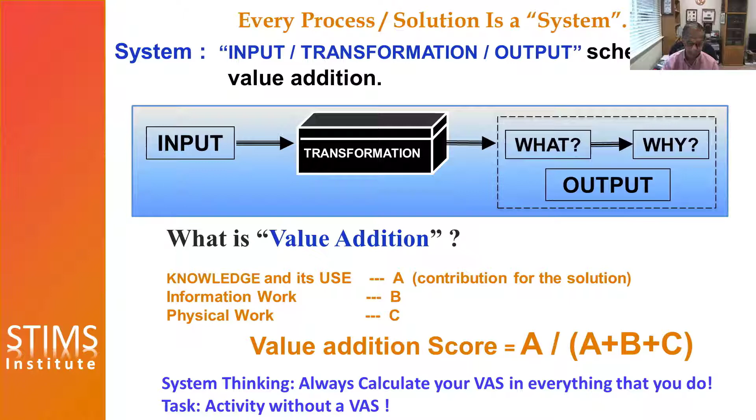Why is it necessary? Because if you take an equation with a numerator and a denominator, you see my math is very simple.

It is not as complicated as some of the equations you may be writing, for which I take my hat off, because I'm never good at those kinds of things that you do.

Nonetheless, you've got a numerator, you can increase that. That is one way to increase the value addition score. The other way is to decrease the denominator. With a certain knowledge content, you don't change the A, but you can decrease the effort put into information or labor. Everything we do using digital technology is an attempt to decrease B and C.

So you've got two modes of improving the value addition score. One is creating new solutions through higher value addition via knowledge. The other is to replicate what's already known through high volume plug and play solutions by decreasing the effort put into information work and physical work.

For example, once you have recorded this seminar, you can disseminate it to 100 people, 1,000 people, 10,000 people. It doesn't matter. So you'll be creating the application solution on the right-hand side. But this seminar itself will hopefully be the left-hand side for a new solution.

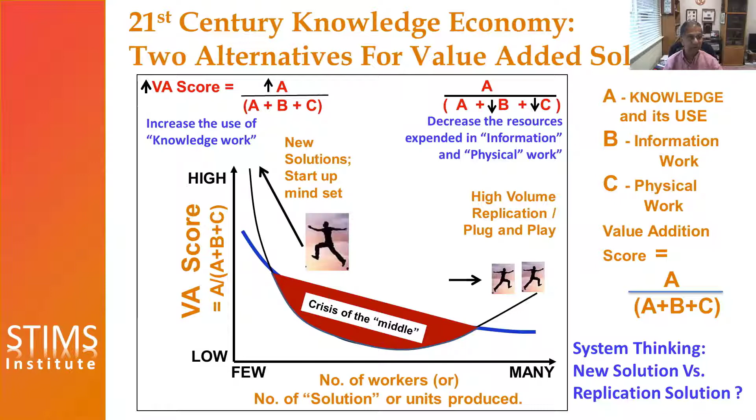Then there is a gap. We have to constantly jump from replicate, plug and play solutions to new solutions, and then not sit there forever, but move back into replication. Many people think they can innovate and stay there, but you cannot. What happens to most entrepreneurs is they jump from right-hand side to left-hand side. Then somebody else buys it, or it becomes an IPO, and they move to the right-hand side. Once there, two or three years later, they jump back to the left-hand side. This is the cyclicity that an innovator constantly pursues.

Those who move to the right-hand side usually get lower paying, low reward jobs. Those who move to the left-hand side, the new solutions, usually get high paying, high reward jobs, because that's where the knowledge gets used. That is why we call our 21st century economy the 'knowledge economy.' It's not because IT and computers are doing things like artificial intelligence and robotics, but because the value of knowledge, when packaged into new solutions, is much larger today than it ever was. And the opportunity to take it into the market and customer space is much larger today than it ever was.

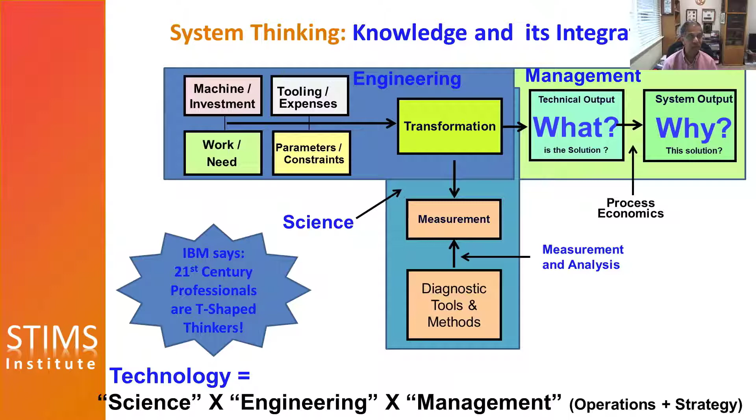If any one of them is zero in our thinking, the value of our technology is zero, as seen by us, and as seen by the users, and as seen by the society. So when we say that we do a PhD in mechanical engineering, but nobody wants it anymore, things like that, it's because we have devalued it ourselves. It's not that somebody else devalued it. So valuation and devaluation is within our own hands, within our own capacity.

So to be able to fill these boxes is what we call awareness. And then understanding what the science behind them is, and the engineering and management and how to apply them, will be called analysis. As a result of which, configuring new solutions based on knowledge and its refinement through awareness and analysis will be synthesis. Developing them into new solutions, implementing, validating, and getting rewarded will be the third level.

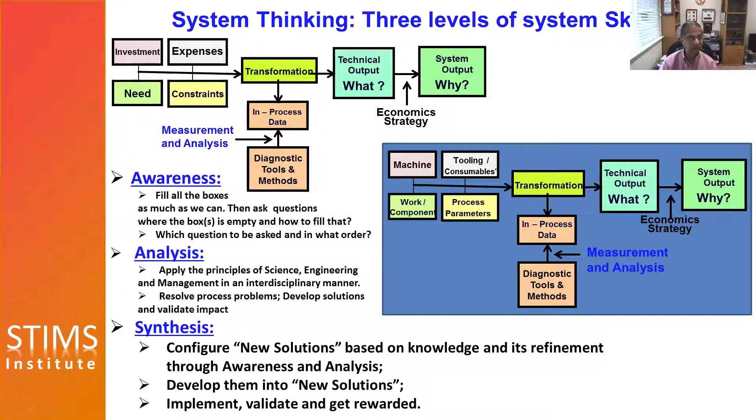So again, the system thinker now has got three levels of thinking, awareness. So we said 2 + 2 equals what? No brainer, 4, okay. But I told you it's 4 types of fruits. I have to tell you what is the technical output and what is the system output. So now if I showed you 2 + 2, in my thinking was all these different things. Now you are telling me, aha, 2 + 2 is a fruit salad or a fruit plate or a decorative arrangement. That's the technical output. And new solutions and getting rewarded for that is my system output. So you see the very simple question 2 + 2, thought of as a system, leads to an understanding of what are the inputs involved in the 4 categories. What is the transformation that I had in mind, which is not shown here at all?

The result of which is a technical output, and the benefit out of it is a system output. This is the simplest thing that is required, and this is our knowledge. No amount of computer can be taught to do that, but every one of us can keep this in mind everywhere we go, and then use computers and systems to exploit that, just like this slide is prepared using computers.

So you may wonder, how is this guy coming from the grinding background, which is usually seen in automotive, aerospace, or bearings, or at best making hypodermic needles, doing in the computer industry? The point here is science, once you understand it, has the ability to permeate any number of applications across the globe. And that is where innovation and opportunities come for those with a scientific background.

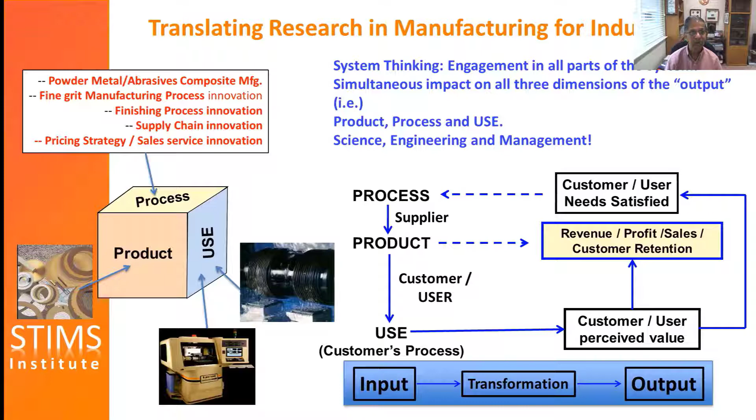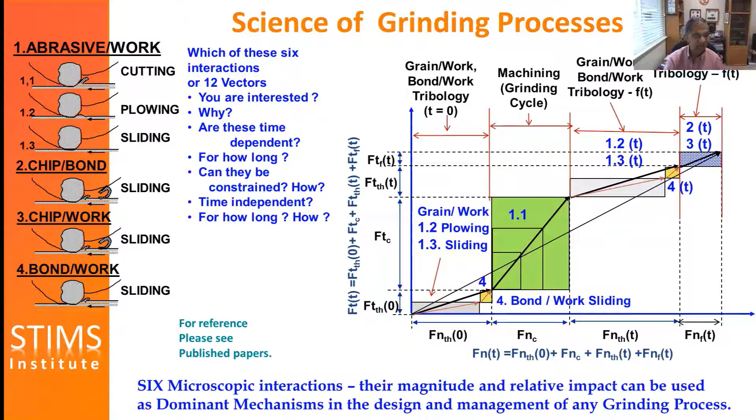Okay, now let's go to the science of grinding ceramic materials. In the grinding of ceramic materials, the same interactions take place, but the difference is the grain-work interaction can lead to brittle fracture or ductile deformation during cutting. There is hardly any plowing, or there will be a lot of sliding. This is from the literature, and you can get the whole reference for this.

Essentially, when the radius of the indenter is large and the applied force is large, it doesn't matter what you do, you'll always have cracks in ceramics. When the radius of the indenter is small, even then, if the applied force is large, you'll have brittle cracks of a different kind, including a median crack in addition to lateral cracks. Whereas for a ductile material, whatever the radius or force used, there will always be deformation.

But there is a sweet spot in ceramic materials where the radius of the indenter is small and the force applied is small, where you end up with ductile deformation. The reasons vary by material and its fracture toughness, and so forth, but essentially you're trying to operate in this regime. If you operate only in this regime, it's called ductile regime grinding. But you can always be sure some interactions will go towards brittle fracture and some towards ductile deformation, depending on the chip thickness, which is the volume of indentation.

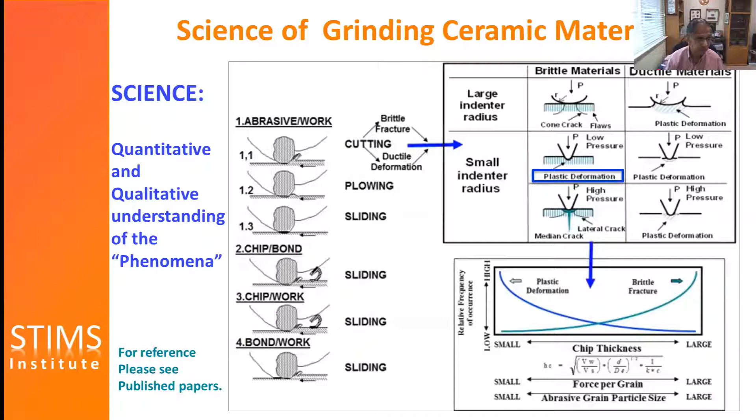It depends on the force per grain, and it depends on the abrasive particle size, which influences both. So essentially, the more you skirt towards the left-hand side, you have ductile deformation; the more you move to the right-hand side, you get brittle fracture. So in addition to general issues of grinding you normally deal with, you have to manage this balance. That's essentially what makes the difference between ceramic grinding versus grinding of ductile materials.

Now we have understood the science, but you have to translate that into application - that's what engineering is all about. So that same picture I showed you now becomes translated into how it's affected by machine tool properties, processing tool properties, work material properties, operational parameters during the process, and output. It'll take me some time, so I won't go into the details now, but you can revisit it another time.

Essentially, you're trying to stay mostly on the left-hand side and never go into the right-hand side. But you can live with some degree of brittle fracture, as long as it's not substantial, particularly in roughing - you can get rid of it in finish grinding, just like you remove the surface roughness that's very coarse in rough grinding of ductile materials, and reduce that in finish grinding. Except here, you're not trying to manage surface finish, you're trying to manage micro cracks.

Typically, most of the literature said ductile regime grinding - operating only in that regime - but that is not economical or practically feasible. So what we did was take what's available in the literature, come up with this model, and understand that we had to stay in a certain regime. Within that regime, you can design a roughing grinding cycle and a finish grinding cycle for economics and productivity, and you could indeed achieve very high surface quality with low brittle fracture and cracks.

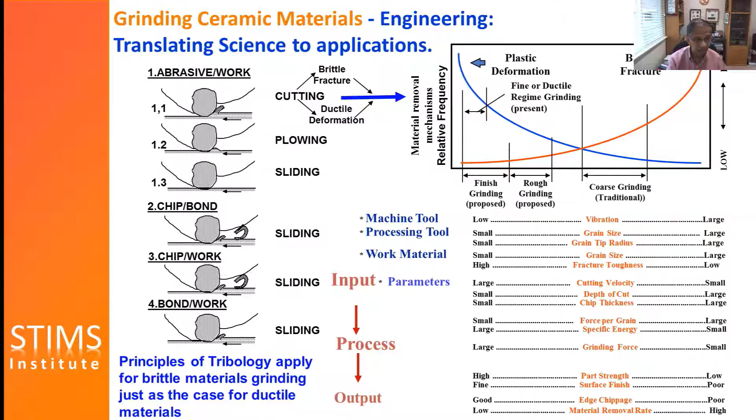But that is what science allows you to think differently from others. Once you do that, you go crazy, because a scientist is also supposed to demonstrate his capabilities in areas that did not exist before.

Here are A1 and A2, two surfaces of the same material. When thermal issues are not managed, it's not brittle fracture, but you'll end up with A1. When thermal issues are managed, you get a very good surface, A2.

Also, you can grind very mirror-like surfaces on a cylindrical or flat surface. You can take a hollow tube, grind it into a worm, and create a spring out of it, then collapse it like a metal spring. If it's a metal spring, you can bounce it forever and it may not break.

A ceramic spring, by the way, I have bounced with great confidence, except after 10 or 20 times it will eventually break. But you can make ceramic springs and collapse them just like a metal spring.

You can grind ceramics to a very thin diameter, as shown in E, without any end support, because the force per grain and the kinematic conditions are so good that you can manage that, and because the material has its own inherent strength.

You can grind a silicon wafer, which is a brittle material, and bend it like a plastic sheet of steel. You can grind a sapphire so plain and so good in surface quality that it becomes transparent.

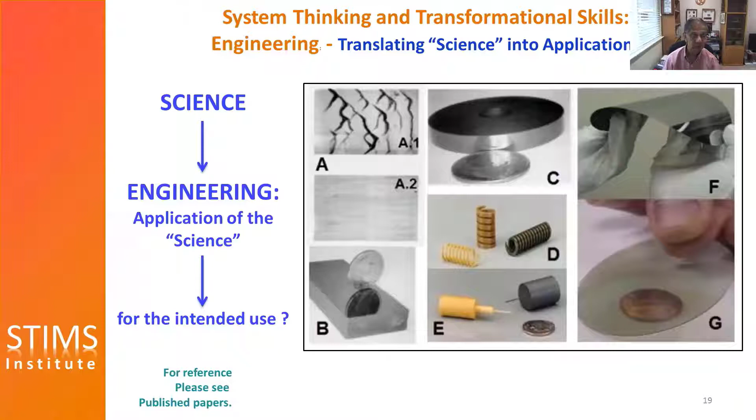IBM, San Jose, this is where I'm living now. I made this presentation, and a gentleman named Dick Satterfield told me they had a need to make thin film heads for the disk drive industry.

Thin film heads are on the tip of the arm here, which looks like this. That is what puts information into the disk and takes information out of the disk through inductive coils. He said, we have to make this.

But to do that, we have to make very thin slices. I don't know if you can see the slices here. This is ceramic that has been cut into those thin slices. So this is what we have to make.

If you're capable of doing that—today we do it with ferrite, which is a very soft material, using a resin bonded wheel. But this ceramic, with aluminum titanium carbide, we cannot cut it. It has glass in it, electric circuit in it. If you've got a grinding wheel, also ceramic, that will do the job, come and see me.

So we came back, made this kind of sample as you see in H, and took it to them. Essentially, I've done the science, I've done the engineering. Now you have to go into the application of the engineering for an intended use that's not fulfilled.

But you also have to make choices. It has to be an emerging market. It also requires system integration—our common word 'system' comes in. So this was for thin film head development for the hard storage industry.

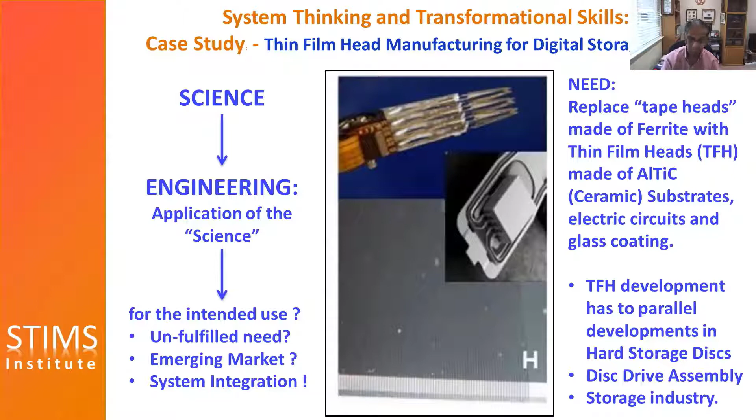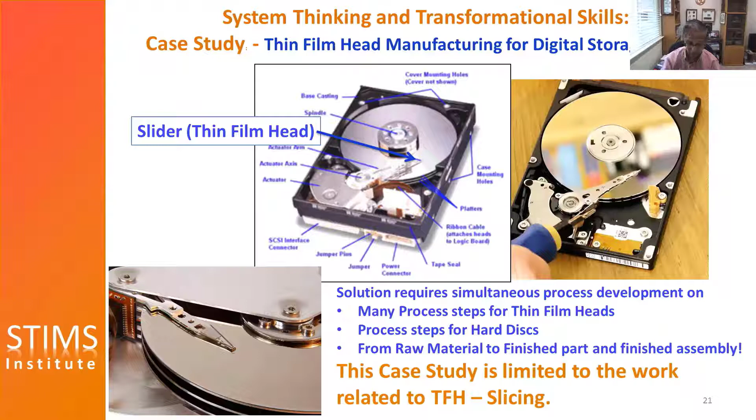Essentially what you see here is the thin film head. Now, there were so many steps involved in this process, but let me just stay with the slicing portion of it. So essentially, we ended up with a grinding wheel.

It's a metal bonded grinding wheel, with a thickness of 40 to 200 microns. These are made of powder metal composites, processed for gang slicing. And this is the set here. We did all of those things, and we had to do many things. But before that, we had to do process innovation. I can tell you so many things we had to do—we'll come to it in a minute.

Essentially, in order to make this grinding process, we had to come up with a metal bond technology. Then the wheels had to be made in very large quantities, and the process had to be developed for that. When you make it, these have to be flat and parallel within micron thickness. Normally grinding wheels are not made to that thickness, so you have to develop a lapping process. When you finish the lapping, we had to get a machine which was $200,000.

That division had only $1 million for total capital spending. So here I'm a new guy in the company, telling my boss I need a machine for $200,000. I had to take the technician who worked on the factory floor, George Staten, along with me to see the vice president, and say, I don't believe it myself, but this is the man who has been with you for 25 years. He says he can make it work, and with this machine we can get a great new business. So he's not trusting me, he's trusting George Staten, who doesn't have an education but has experience and trust in the company. Essentially, there is what we call emotional intelligence that has to be part of the innovation.

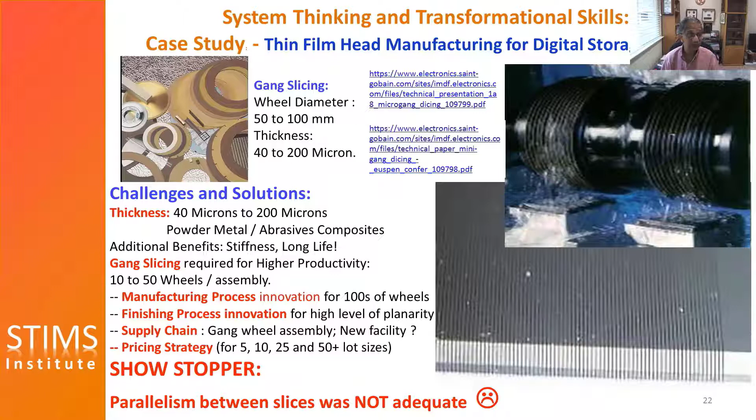In fact, today, most of our supply chain solutions -- if you try to make any variation, you will kick it out as non-standard. So most of the things we do as industrial research will be non-standard. This is where most people who do research in industry today suffer and fail, because they cannot go beyond the comfort zone of engineering and into the pricing, into supply chain. All of those things are required in order for the solution to be completed.

So after doing all of those things, we still were not successful, because once you're doing slicing, everything was being made -- productivity, everything was good -- except the wafers were not plane and parallel. What do you do then? You find out that this horizontal spindle surface grinder we're using, with a heavy spindle on it, was deflecting. We had to consider it as a cantilever beam. So we had to think of a way of solving the problem by coming up with an outboard support, like you do in a twin grip in a centerless grinding machine.

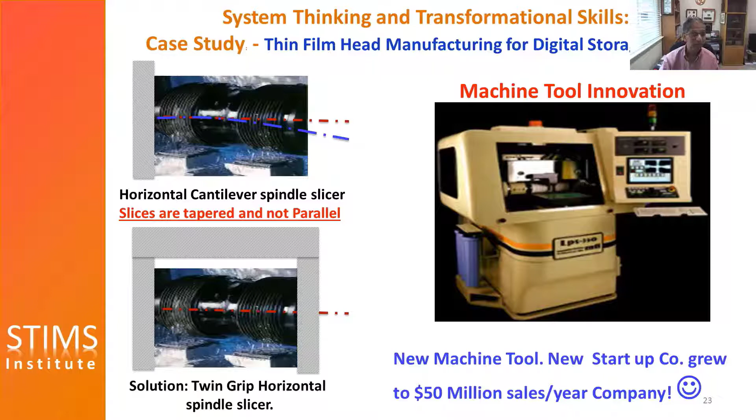That resulted in a whole new invention of a new machine -- startup of a whole new company to make this kind of machine, called MTI. In the late 80s or early 90s, when everybody said the machine tool industry is dying, this machine tool company came out of the ground, and that ended up with a solution where you have a new machine tool, with a new design and precision.

Now we are coming back to the system description of our solution with more details in it. So you see the new machine tool, the new design. It also has to have precision because of step and speed capabilities, manufacturing and distribution, customer testing, qualification support. Many of these things most machine tool companies would not offer because they only want to make the machine and sell it -- customize the wheel fabrication for different thicknesses and spacing, gang assembly.

They also have to have distribution services, because IBM San Jose may want something, and then IBM Mainz in Germany may want something else, on and on. But once we open our mind, we can learn all these things and accommodate all these changes. Anyway, custom wheel fabrication, gang assembly, distribution service.

On the grinding wheel side, we had to come up with a new design, new composition, new process, new finishing solution, pricing strategy, people, team. I told you all those things. On the component side, materials technology kept changing as they came closer and closer to commercial.

Dedicated pull customer - that is the biggest thing. If you got a pull customer who is part of your team and wants to make it work, there's nothing better than that. Like a rapid growth market and many startups.

And this is what you have to pick ahead of time. Just because you did research and whoever wants it, you just keep trying it. And there are lots of people who want to try because they're task oriented. You have to be system oriented and find the right partner who really wants to make a difference. And many startups were at that time.

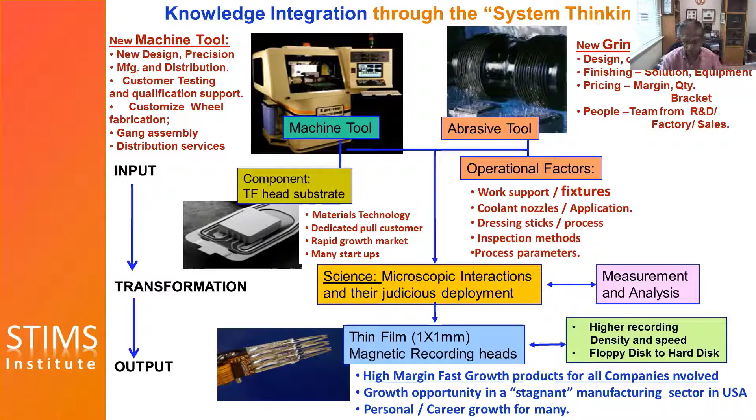So to summarize, I told you about system thinking, and there are a set of seven transformational skills, of which I talked about the emphasis on science, knowledge integration, and end-to-end innovation. But there are others - each one of them will constitute a seminar by itself. In fact, ideally, a course can be taught on system thinking and transformational skills, about 10 to 12 classes. That will be very valuable and powerful, not only for your students, but also for people collaborating with you from industry, and not only for your department, but across many departments.

So to summarize then, yes, we need academic education, which you are all providing very nicely. You also need industry collaboration, because that's where the rubber meets the road. But you also need transformational skills, which are not formally taught today. And without that, we are acting only in activities that are task-oriented, and we don't have the time.

You have to reverse the direction of these arrows - from doing what you're asked to do and saying 'I don't have time, I don't have anything, I don't have a result, life is frustrating' - to a transformational approach where you must be goal-oriented, where every day you do something that must have some technical output and a system output, which lead to system thinking, common language. We only had the beginning of the common language today - emphasis on science, knowledge integration.